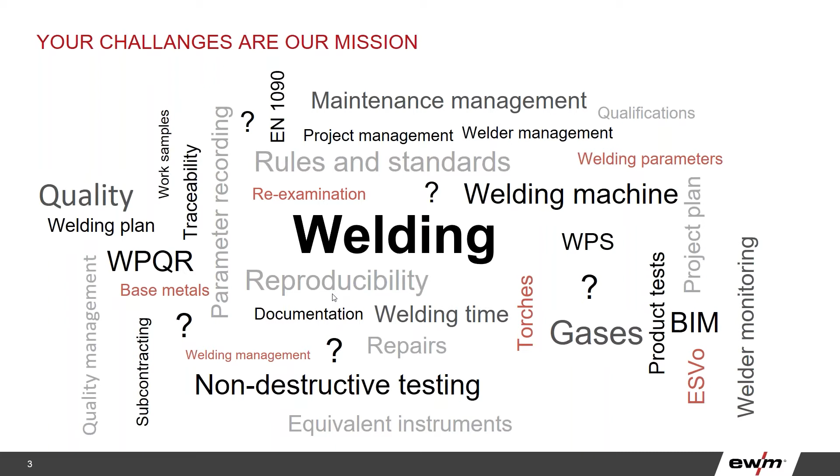Then we are thinking about predictive maintenance. How does this work in all the production sites? How can we assure that our torches are always cleaned, that the contact tip of the torch is good and that the welding quality is the same as from day one? Then we need to know what kind of process we have used in that project.

What about the employee? Is he or she certified? Are they certified? Do they have the needed certificates to make this happen, to weld in that project? And what about the documentation?

So how can we do it? Is it pen and paper? So is somebody running around in the production and looking at parameters from the welding machine? Is somebody running around and taking notes about the welders? Okay, who's welding where? What is the component info? What is the seam number? What is the non-destructive testing on that seam number? So how are you doing this?

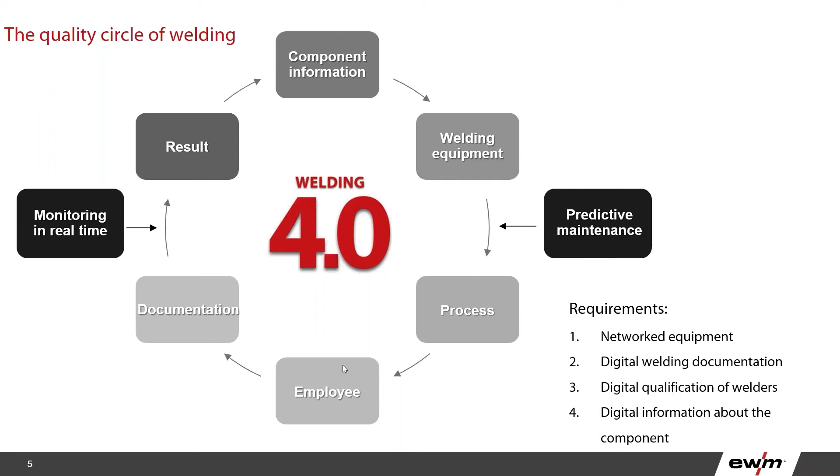And if you then see that this or that is not good enough, we have to re-weld something, or we have to repair anything, then you go back and repair. After the repair, you have to wait a little bit until it's cooled down, because of course you need time for the cooling. You need to look at the heat in the seams, and then you have to weld again. And after welding, the test comes again.

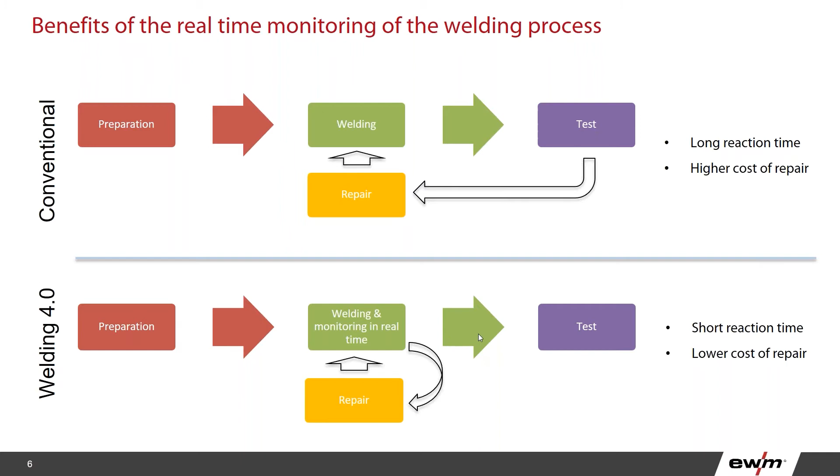So that means if you see already in the recorded data that something is wrong, that the welding parameters are absolutely not correct, or we have made some mistakes there, then you will be informed by the digital system, and you can decide to repair or go for testing. So in this period you can save a lot of time, because you have the possibility to react even before you test the work when it's done.

Another big thing is predictive maintenance. If you go the conventional way, a lot of times when I enter a welding production, the welders are using the welding machines and the torches for work. And of course, you weld with a lot of heat, and that's the reason why the welding torch sometimes gets broken.

If we look at the contact tip, for example, the contact tip needs to be changed, and most of the time it will be changed only when you cannot weld anymore. So your indicator is, okay, the welding machine is not working anymore, and then we are going to change something. But the thing is, you are welding in good quality because your torch, your wire feeder and your welding machine are in good condition.

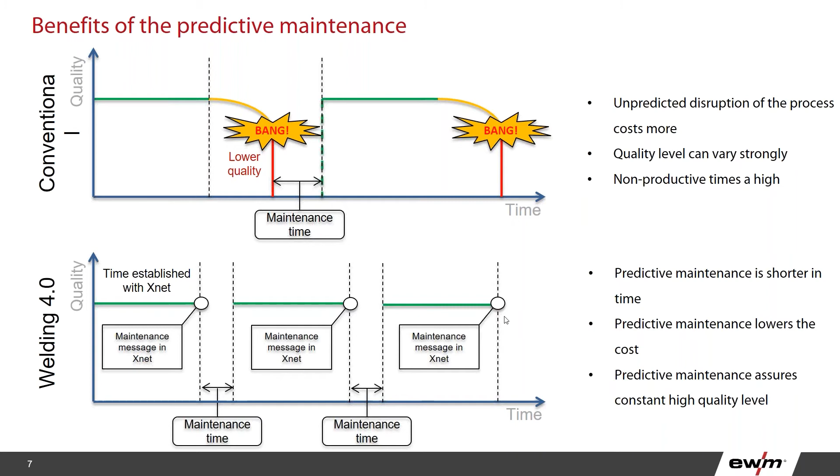Even sometimes you need then to maintain the product itself, and then you start again. And this is always the running circle. With predictive maintenance, if you have a system that gives you a feedback about when to change something in your system, you will get a maintenance message in XNet. XNet will show you, hey, look, you have welded now, for example, 20 hours in welding time. So look on the contact tip, change it before the welding stops. So you have prepared maintenance times, and the quality is not going down because you have constantly the same quality, because you're constantly maintaining your equipment.

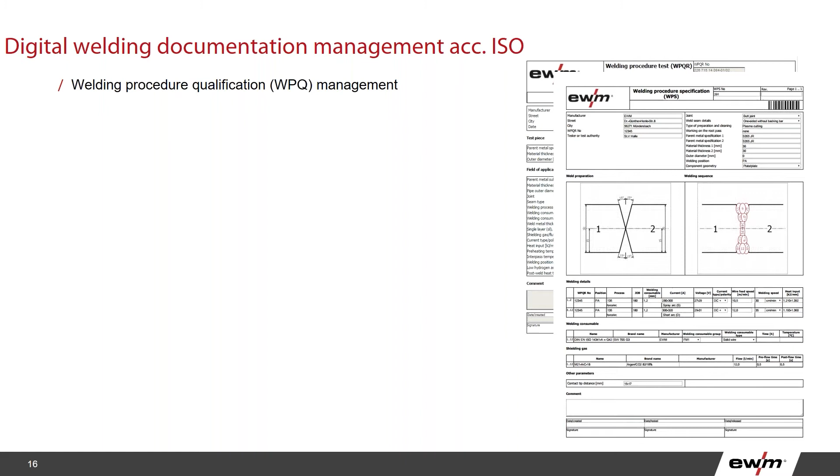For welding procedures, to digitalize them and to have them in the same kind of system, we have done a lot of work on the WPS templates. So with XNet, you can have your own WPSs, or you can make them in XNet and have them digital. What we have done here is a drawing tool that is reacting on your typings. So if you type in, for example, 15 degrees, then the drawing will change, so that you can see, oh, all right, if I do some preparation here or there, then the drawing is reacting on what you are typing inside the system.

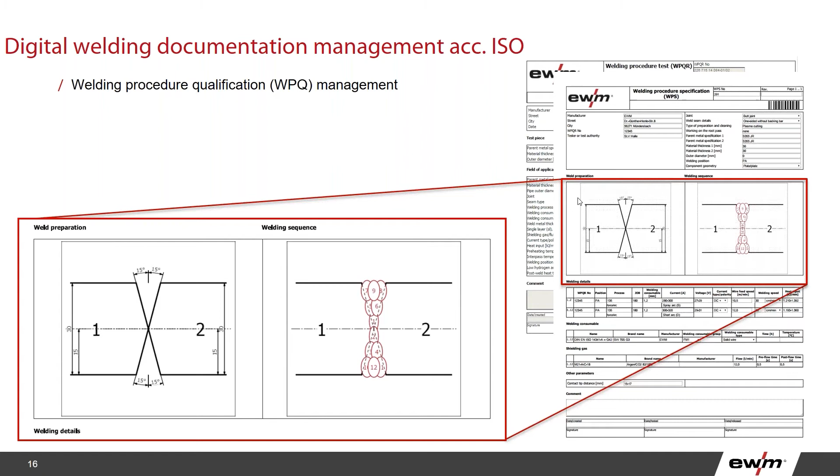You can print it, of course, and even the barcode will be there, so that you can afterwards scan the WPS to have it in the final documentation, so that you know the connection between the part and the seam number with which WPS it was welded.

The same we have done with the welder management. So you can have the certificates of the welder inside the system, and you will be informed about the prolongation. A lot of times, if I am in the welding production, the prolongation is done by Outlook. So the welding engineer gets a message from Outlook saying, hey, you need to do some signatures for the welders. In XNet, you can approve or prolong the welder certificates in a digital way, and you have them all up to date. And the system will inform you if somebody is running out of certificate, and you have enough time to react on that.

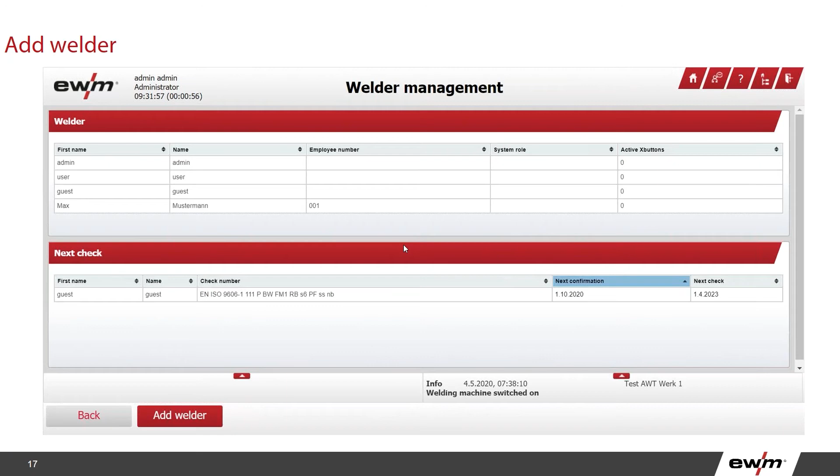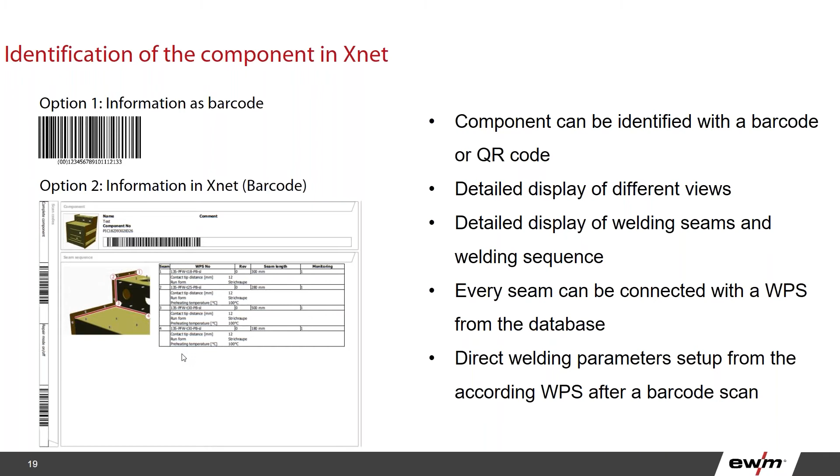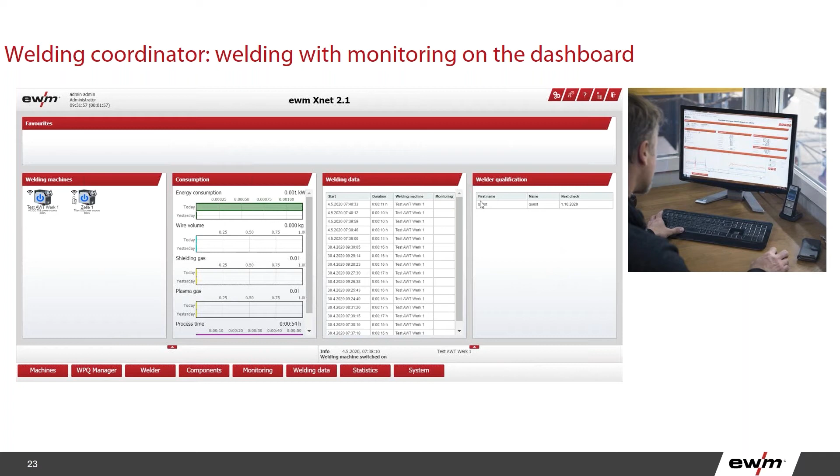This is the dashboard, and one of our clients is GEA in Holland. They are using XNet for their welding production, and you will get some information about the welding machines. So what are the welding machines doing? For example, you can see here on the symbol that the welder is logged in, but both machines are now in standby, so for more than 50 minutes there's no arc. You have a consumption display, so that you can see the comparison between today and yesterday in terms of energy consumption, wire volume, shielding gas, plasma gas, and so on. The welding data, and of course the welder qualification. So if you have more welders than I have here, just one guest, then you will have the information about all your welders.

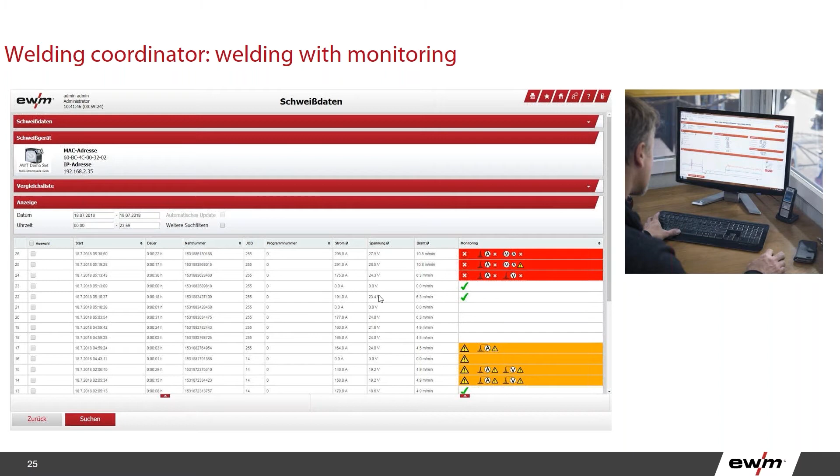If you weld and you have monitoring on this product, then the system will give you information about some possible errors. It doesn't need to be an error, it is just a potential error area. So if you have it after the welding in red color, then you know, okay, here I need to look on it, I need to supervise this welding. What is happening here that I have it in red color? And you see here how long it takes, so it was a weld of 22 seconds. You have the seam number, the job number of the machine, program number, then the current, the voltage, and the wire feed speed.

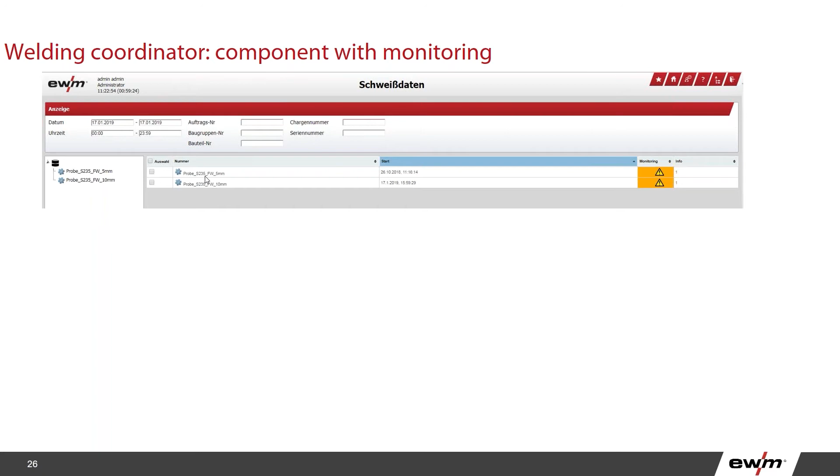What we have done here is to make a kind of component management. So if you say I have a component with a certain barcode and we want to weld it, let's search.

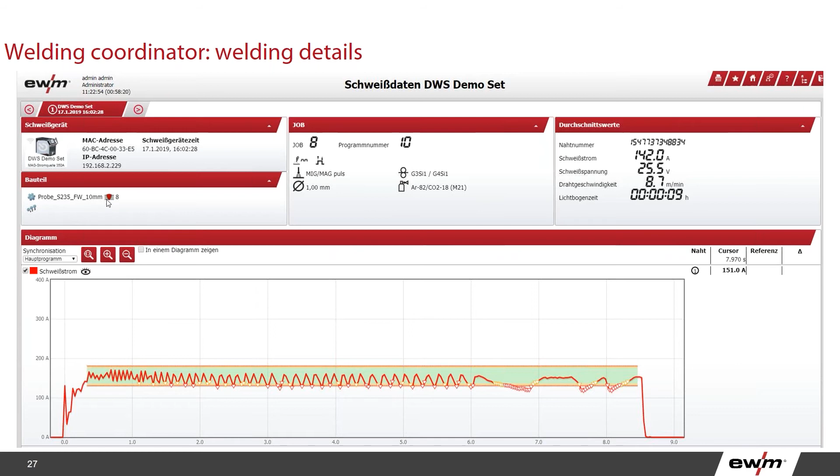So what happened here? What is this? Why are we going so far down here and then again up? Is it something because of the torch, or is it some dirty stuff on the plates or whatever? So you have the possibility to overwatch it, and the info is here. You can see the component information. You see this is seam number 8 on this specific component.

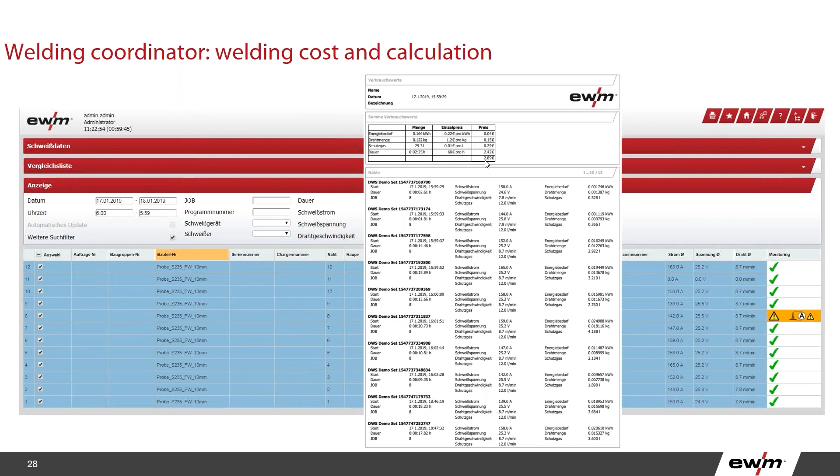And you have some energy consumption, you have the wire volume, you have the shielding gas, and you have, of course, the duration. And we see that, for example, here for 2 minutes and 25 seconds of welding, it's roughly €3 that we spent on that, some kind of short welds.

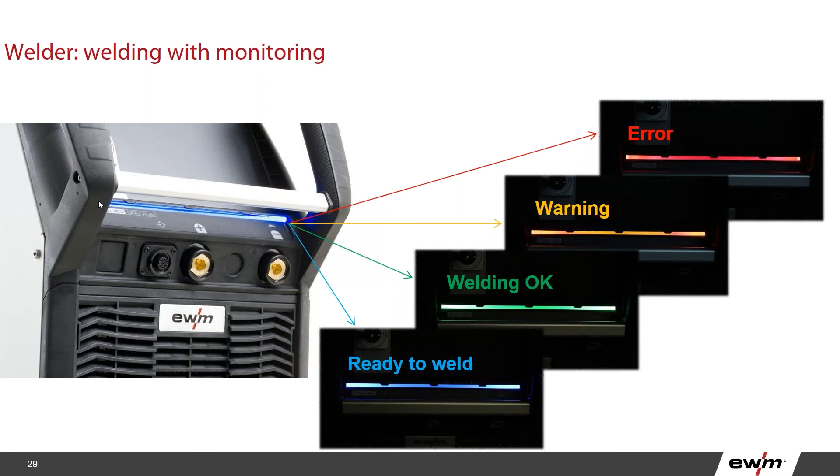And error is then the potential error. So you know that you overran the minimum or maximum value. So have a look at this, and the welder is informed by the light of the machine.

The maintenance is done with some timers that you can set. For example, like I said, the contact tip, remaining 8 hours and 43 minutes, and then you will get a message to change the contact tip. You have the shielding gas system, wire guide, or wire feeder 1 and 2. So you can set different timers, and the timer will give you information about when to change something, or when to do a cleaning, for example, on the welding machine.

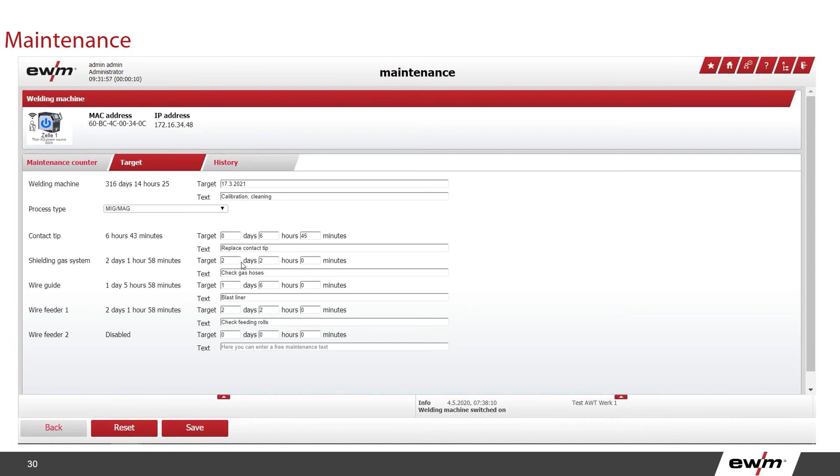So the current of the wire feeder unit, because as a welding machine manufacturer, I have noticed that more than 70% of the errors, when a customer is calling us and saying, hey, the welding machine is not working properly, you can be sure are a problem of the wire feeder or a problem of the torch. Maybe the wrong rollers, the rollers are closed too tight. The welding torch is broken, the welding torch is damaged, it's the wrong gas, whatever.

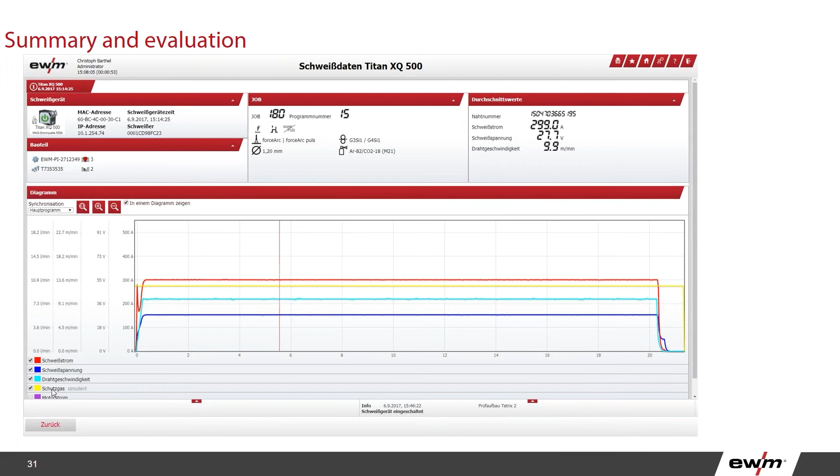And with the motor current, you can be sure that the hose package of the welding torch is not damaged or not dirty. So if you have a current and you can overwatch it and it's going, for example, above 3 amps, then you can be sure, okay, I need to look at it. Maybe the torch is broken. Maybe the contact tip in front is the wrong one. So this gives you an idea about your welding process in the production.

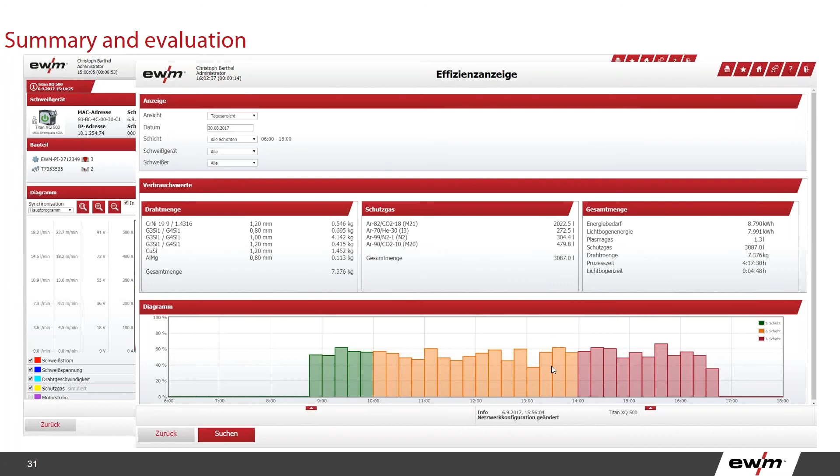You can have a screen about your efficiency. So if you say, okay, we have 3 shifts, shift number 1, shift number 2, shift number 3. It's just a picture, good to know. So how efficient are we in our shifts?

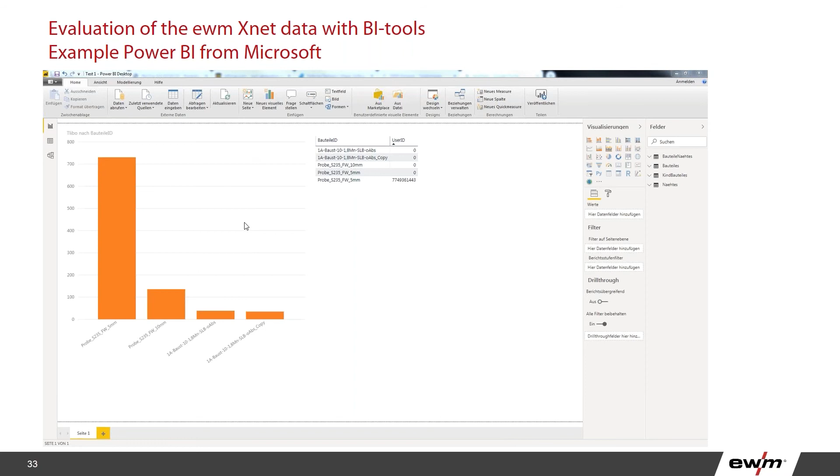And last but not least, you can export the data. We have a very open database - it's an SQL database. That means you can download some BI tools from the internet and make your own graphics, your own graphs. This one was created by a colleague of mine. So you can use BI tools to make some stats or graphics for your own use.

And the biggest benefit is that if something happened, you have recorded data. The best example was, I think about a year ago in Alkmaar, in Holland, at a soccer or football stadium - the roof came down because of wind.

It was too windy on that day, and the soccer players would normally play, but they said no, we cannot play, it's too windy. They canceled the game, and that was good because the roof came down and damaged more than 200 seats. Luckily nobody got hurt, nobody was in the stadium at that time.

But of course a lot of questions rained down on that welding specialist, because everybody was asking why the roof came down. Show me the parameters of all the welds, show me the people or the certificates of the people, where they're certified, what about your WPSs, was everything done by the rules?

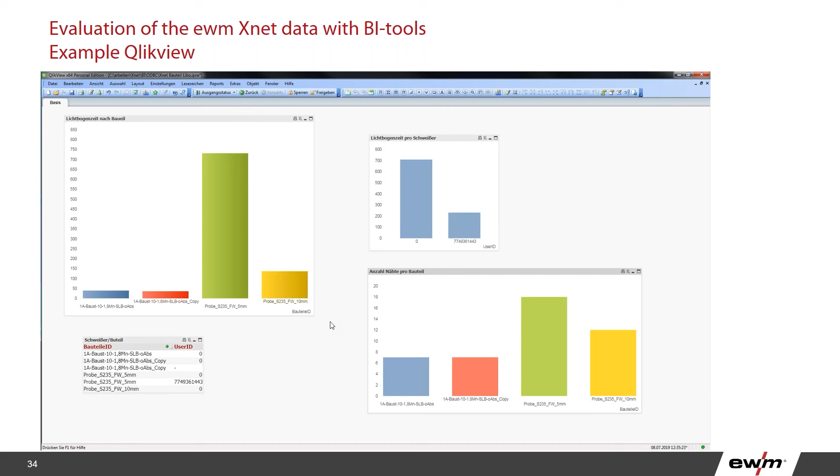And if you use a kind of digital system, then the documentation is done kind of automatically. So you have much more time to do important things and not to use a lot of time for paper documentation. So I hope I gave you a short introduction.

It's really a big thing to make digitalization in welding production, so I tried to shorten up the presentation. Normally I do this kind of presentation in 2 hours - today it was 20 minutes, so I hope you got a lot of info.

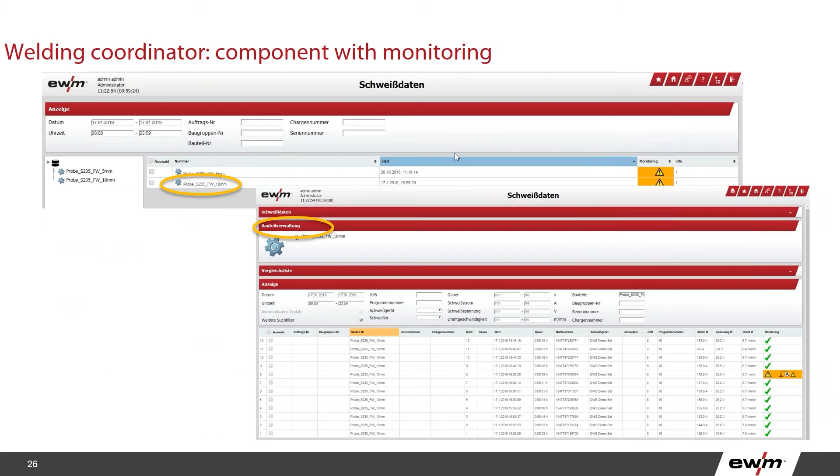Sorry, we have all this information from the software on our homepage. If you go to EWM-group.com, you will find the EWM software, and there - I think it's on my first slide - you can find all the information about Xnet and Welding 4.0. So it's EWM-group.com, then product and software, and there you'll find all the info you need.